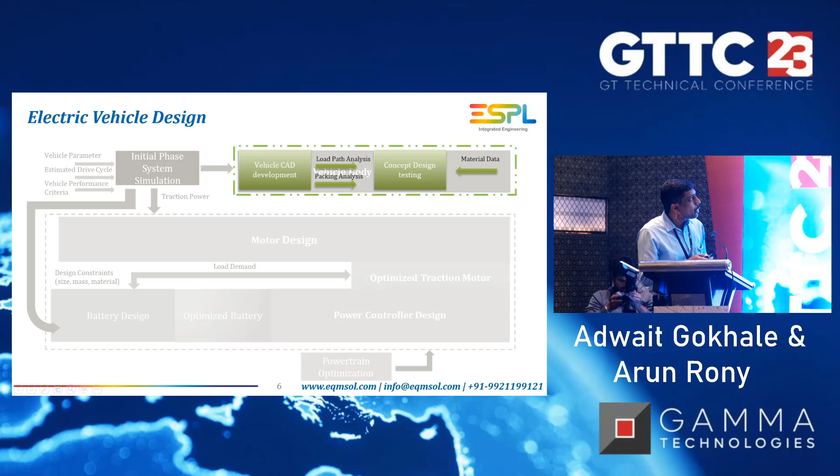Now, once we have the outer shell of the vehicle body, we will go for a space model development. This helps us to analyze different vehicle shapes and floor configurations. This is followed by a packaging analysis of the parametric CAD model. And the space models are further examined using topological optimization on the global load paths. From these analyses, we will be able to develop the body in white, BIW. That would be our first stage. Then at the component level, we have the traction motor. We are starting with the traction motor.

And for any design of motor, we start from the initial specifications. That's the torque, speed, and the dimensions, size restrictions. From these, we will be able to develop an analytical model, which will be further optimized based on the winding architecture and the topology. And then they will be subjected to the target drive cycle evaluations. And from there, we will develop the most optimized motor design. Then that will be taken for further advanced electromagnetic simulation, multi-physics optimization, and then integration to system level.

Now we are moving on to the next important component, that's a battery. And at times, it's the most important and expensive component which powers the entire electric vehicle. Here also, we will take in the basic size constraints, and then we go into the modeling of the battery. So that can be broadly classified into 3 stages, starting at the cell level where we choose the cell chemistry, the cell type, and then into the pack level, where we study more about thermal management of the battery pack. And then finally, taking the optimized model into system level to see the performance of the battery pack at various operating points.

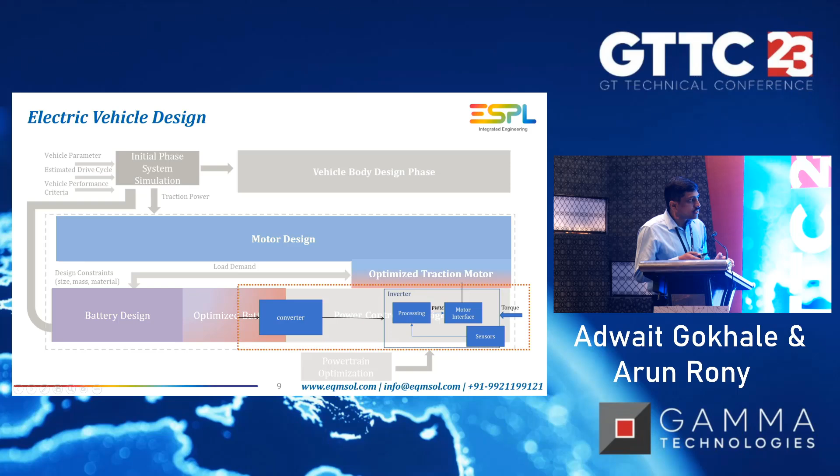Finally, we have the power electronics, which basically includes the converters, inverters, and onboard chargers. They typically operate at high frequencies, high voltage and high current, so that leads to high switching rates. This translates to high thermal responses, calling for thermal management of power electronic devices. So these are some of the components and the overall stages which are involved in a battery electric vehicle. So the key takeaway here is this is a multi-physics phenomena, as we saw, and it calls for an integrated engineering approach. So we need to evaluate them both at the component level and also at the system level.

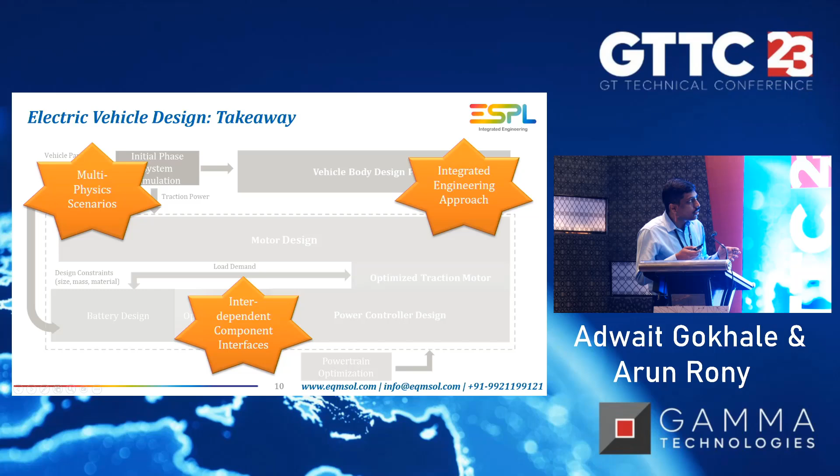So now we are moving into the objective of the current study. So here we are trying to define the methodology to develop the three-wheeler in GT-SUITE and to evaluate it. So it has been basically done in 2 stages. One at the component level, where we'll be validating the individual components and then defining the models in GT and further taking them into system level. And then finally, we'll see the performance of the system as a whole.

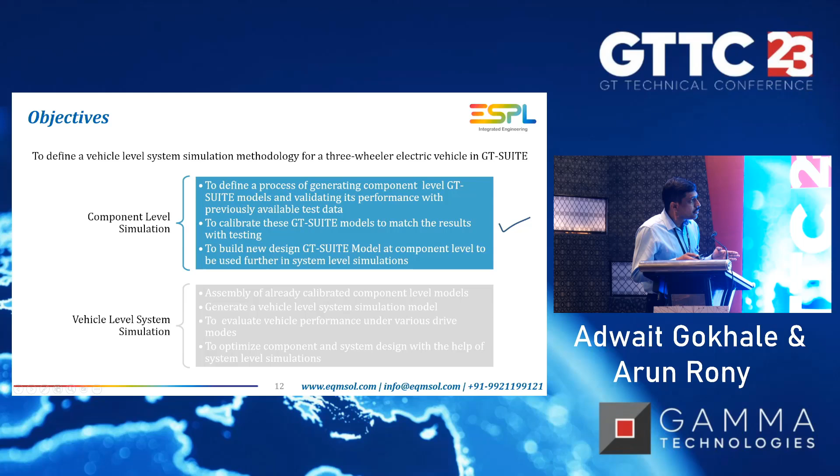So first we'll start from the component level simulation. So we are starting from the traction motor, and we are validating this with respect to some test data. So from there, we have got the winding parameters, our material definitions, as well as the geometric inputs. With this, we will be able to develop the analytical model, and from that, we develop a more detailed finite element model for evaluating the flux distribution of the motor. This again was validated against the test results. Now, once we have this validated motor model from our electromagnetic solver, we will be able to take it to GT. Here, GT offers us 2 methods to model it. One is the equivalent motor method, and another based on the efficiency map.

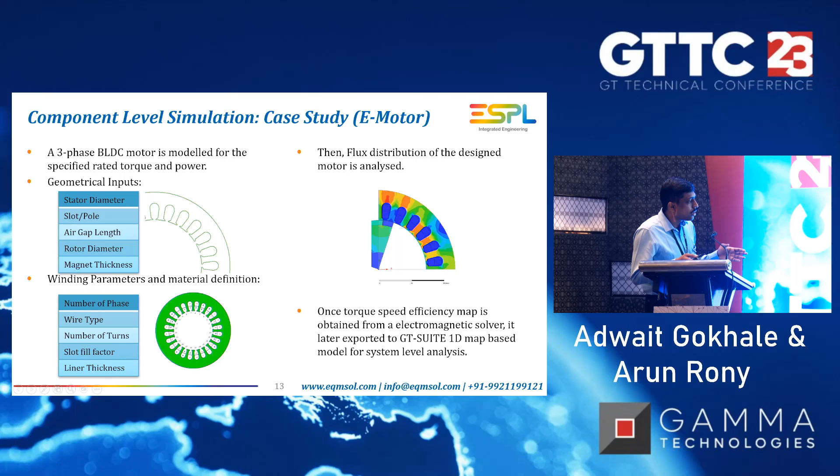So these are some of the outputs of interest that we got from our electromagnetic solver once we model the motor. On the top, we have the efficiency versus speed curve, the torque versus speed curve on the right, and at the bottom, we have the current versus speed curve. We can observe some high current at the starting. This is owing to some structural characteristics of the motor. And similarly, owing to the high drive force in the beginning, we are seeing high torque at the beginning. And with respect to correlation, we are able to see less than 10% deviation with respect to test results.

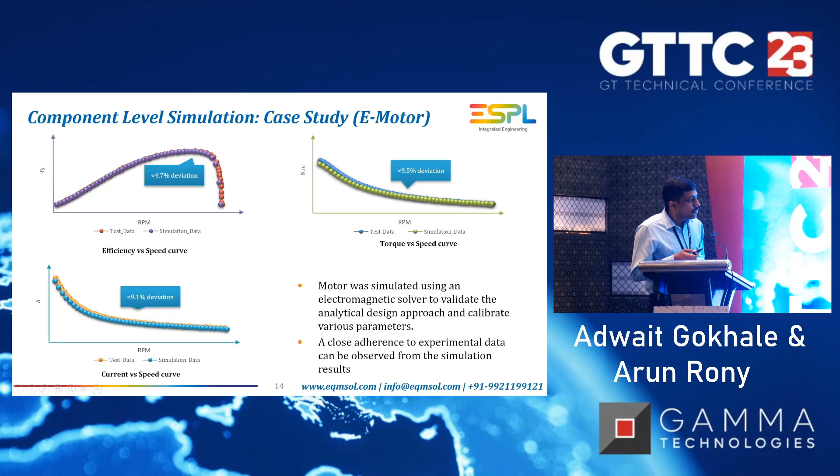Now moving on to our next component, which is a battery. Again, here GT offers us 2 methodologies. One is a detailed electrochemical modeling with the help of GT-AutoLion, and second, an equivalent circuit-based approach, which takes in 2 key primary inputs. One is the internal resistance for charge and discharge curves and open circuit voltage curves for charge and discharge cycle. So below we can see a typical equivalent circuit for a battery model. On to the right, we can see how these input curves have been fed into GT.

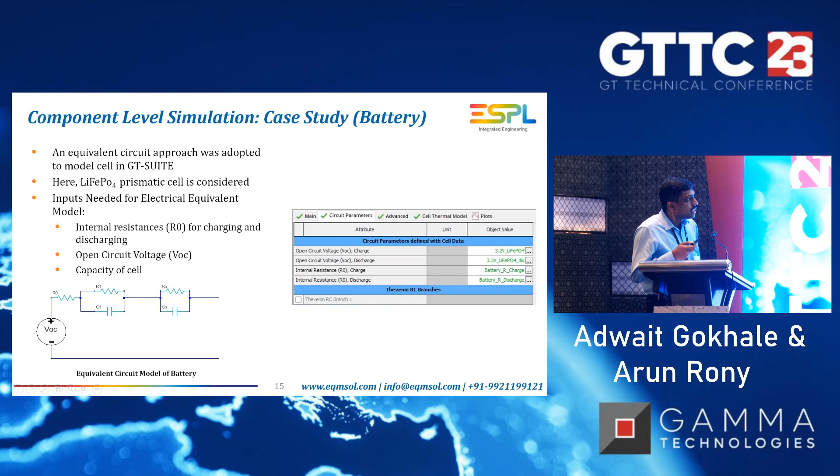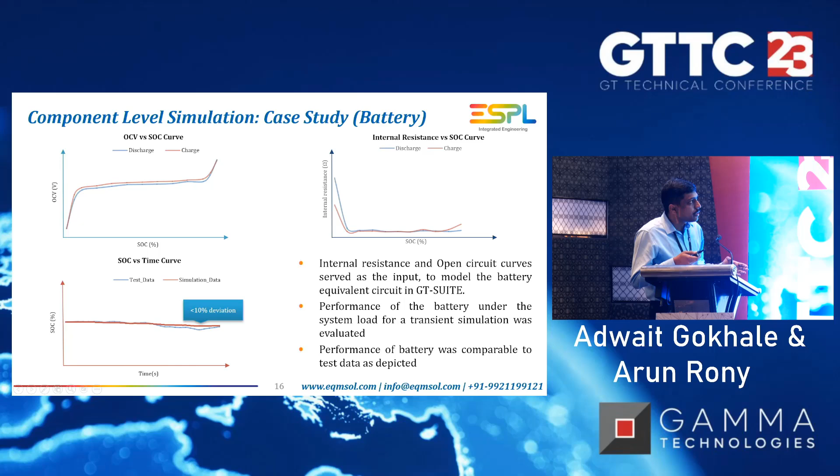On the top, we have the SOC curves for open circuit voltage and internal resistance. These are the characteristic input curves which are fed into the model. And here we have considered a lithium iron phosphate cell, a prismatic cell, for our evaluation. And we can see the test result with the SOC versus time, and the correlation with test results for the performance of the system under the transient simulation. So we have seen how we have modeled the electric motor and the battery pack in GT and how they are calibrated with respect to the test results. And now we move on to see how to take these components into the system level.

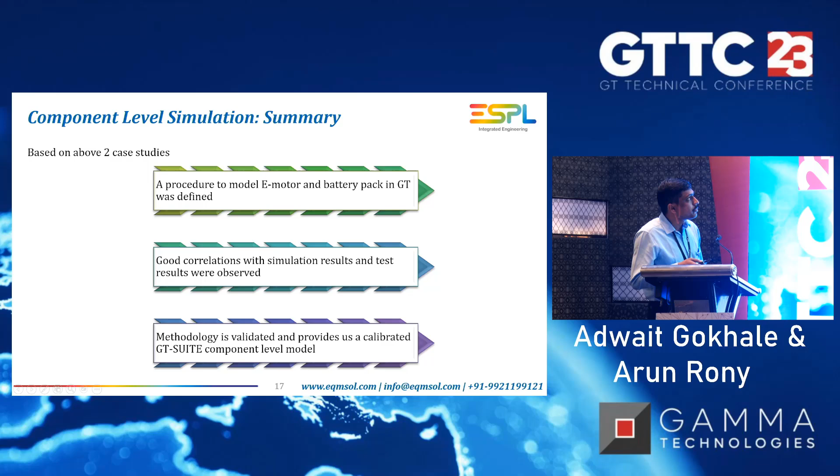Let's start from the system level by looking at the specifications of the vehicle. So here we have considered a commercial three-wheeler vehicle based on the available data, and throughout the entirety of the simulation we have taken 3 passengers, 1 driver and a payload. And on to the right we can see some of the key characteristics of our vehicle that we have considered.

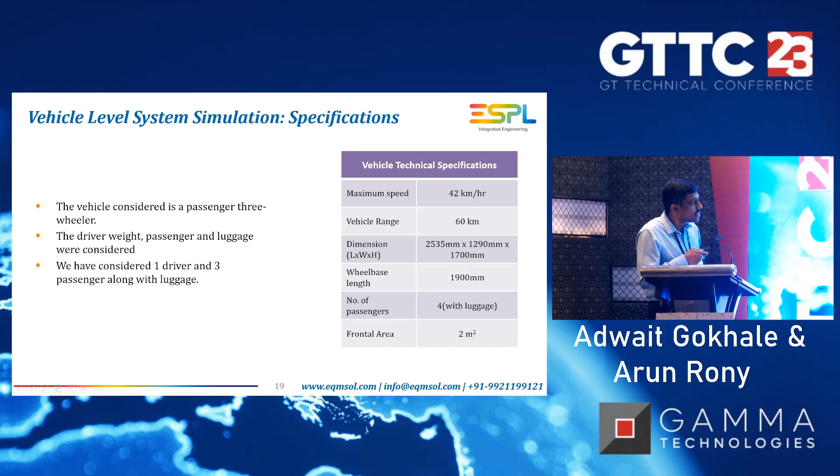Next, we are talking about specifications of the components that we have validated earlier that have been taken into the system level. So starting from the motor side, we had considered a 3 kilowatt motor with a rated speed of 1600 rpm and having a torque of 20 Newton meter. As discussed earlier, we have considered an efficiency map based model. So here it is a contour plot of torque, speed and efficiency points. This is what is being fed into GT as a lookup sheet, and GT will interpret the results using this.

On the right, the battery pack we have considered is a lithium iron phosphate prismatic cell, which we discussed earlier. And for a range of 60 kilometers, we have considered 15 cells in series and 4 cells in parallel, having a rated discharge of 1C. So these are the components that we have considered for a system level analysis.

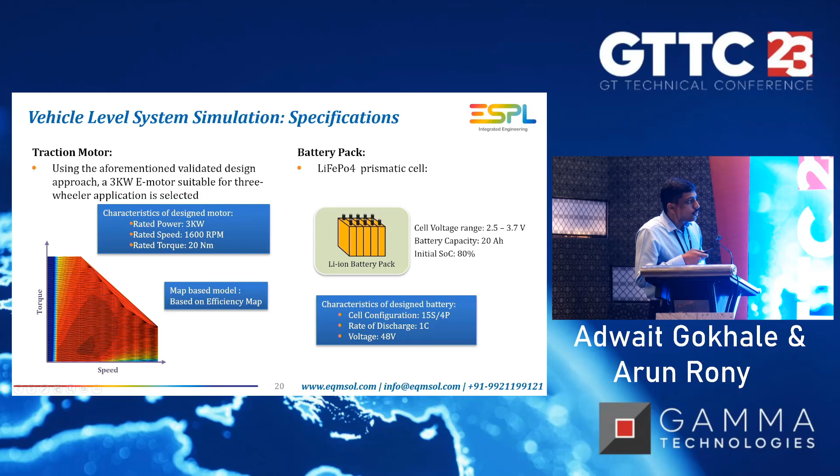Now let's look at the 1D map workflow in detail. In the middle, we have the vehicle body component, which calculates the longitudinal motion of the vehicle. And then onto the top left, we have the electric motor model, which is based on the efficiency map. That takes in the brake torque and the power as input to give out the torque speed with respect to efficiency map points. This is connected to the differential in the middle that we can see. That splits the obtained torque into the left and the right wheel.

The axle component considered here is actually rotational inertia, so any compliance and damping is being ignored here. The tire component basically computes the traction and the rolling resistance. And from here, the gross tractive force and the normal load on the vehicle and the axle based on these tractive characteristics will be computed.

And then onto the top right, we have the driver model, which takes the vehicle speed from the vehicle body component and the motor speed as its 2 inputs to give out the required wheel brake torque for the vehicle acceleration. It's basically a feed-forward component that has a PI module also inbuilt that minimizes the error between the demand and the instantaneous values that are coming in. And finally at the bottom we have the road component, which takes into effect the road grade and the road curvature into the simulation.

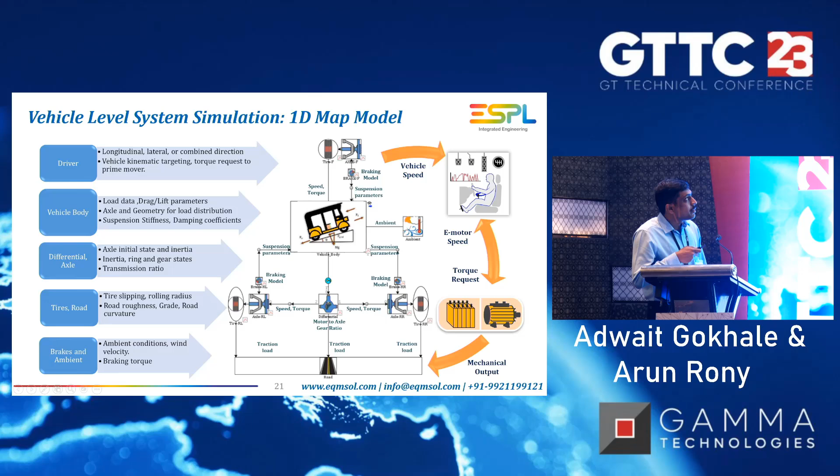So those are some of the key components involved in the vehicle 1D map model. And here we have considered a very primitive battery controller which aims to limit the battery power to avoid overcharge and discharge. So this is a primitive battery controller that we have modeled for initial analysis.

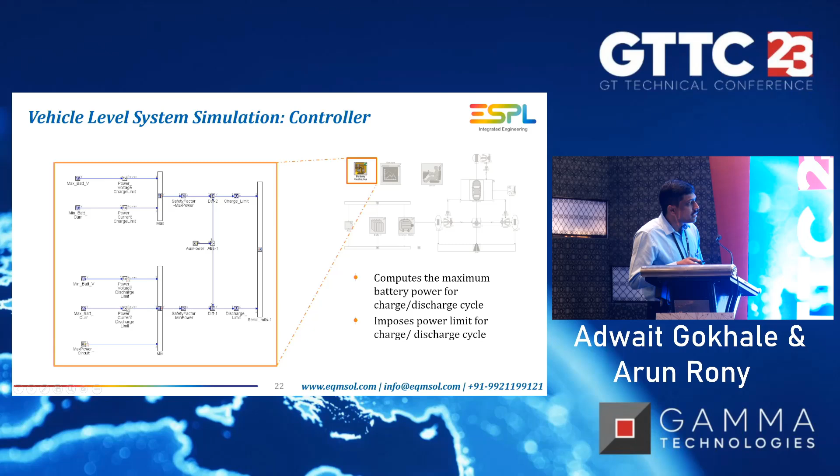Now moving on to the loading scenario, we have considered the IDC cycle. GT provides us a default cycle that can be taken, and some characteristics of the cycle are on the right that we can see. And we are given a starting battery SOC of 80%. The IDC is typically a cycle of 6 segments of 108 seconds in duration, so we have considered 1 cycle of that.

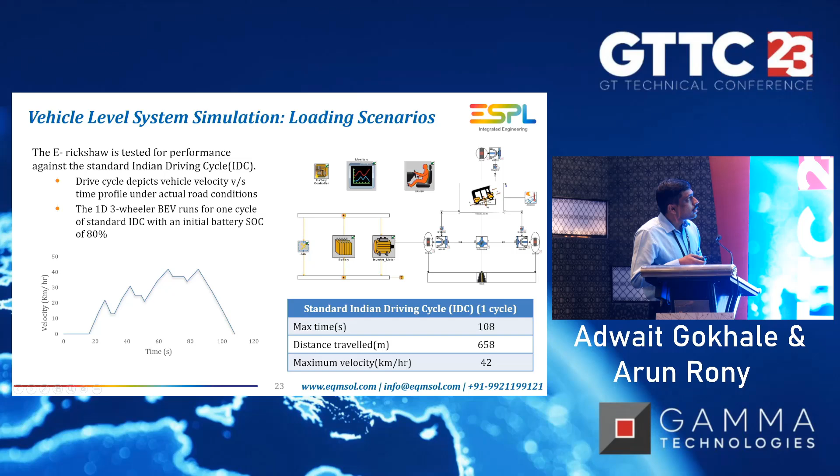And these are some of the outputs of the 1D system simulation. On the top, we have the gross tractive force that has been computed, and it can be observed that the main force that needs to be overcome is the linear acceleration forces. On the bottom, we have the relation between the motor torque and the wheel torque based on the gear ratio that we are given.

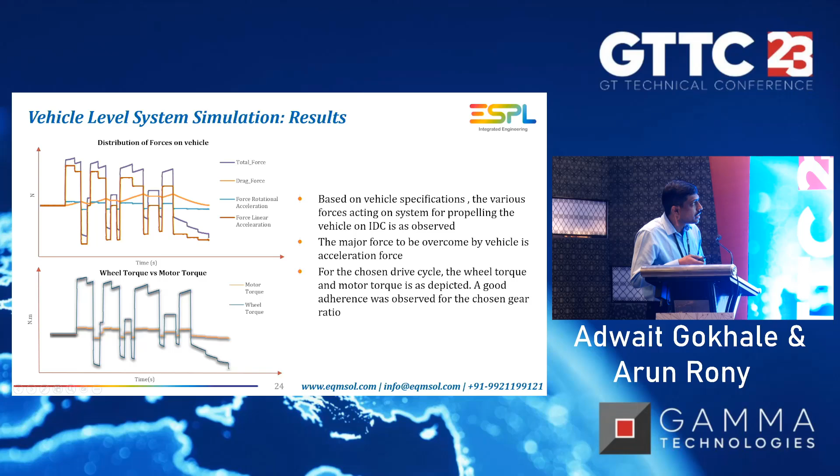Next would be the effectiveness of the system. We can see how it is effectively tracing the actual demand and the requested brake power. And also GT will be able to give out the energy consumption for the range that we have specified for 91 cycles of the IDC. So we can see the energy demand prediction also from the output.

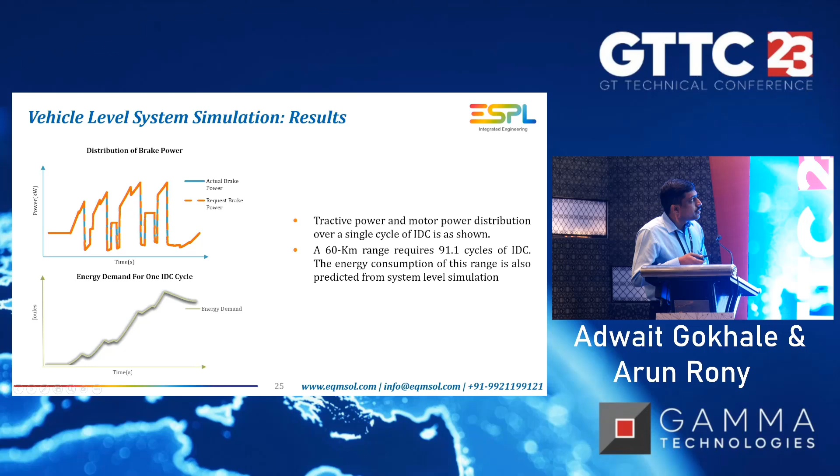Moving ahead to some of the conclusions. We can get an easily configurable model that we can scale up or down. And also we can consider multiple DOEs and see the performance of individual components. In GT, when we talk about GT 1D map models, it offers us quick and easily configurable models. And we can do better sizing performance easily and at a reduced time. Also, it helps us to evaluate multiple DOEs and their performance criteria. And eventually, all this translates to reduced physical test costs.

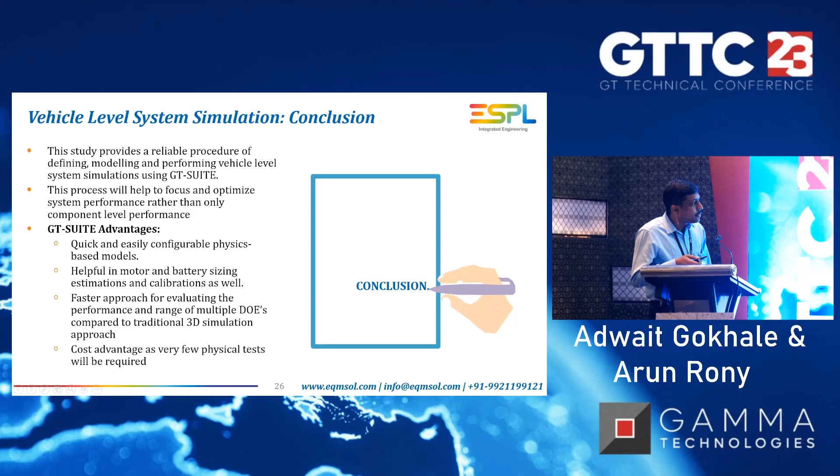And some of the assumptions in our early initial system model are that we have not considered thermal dependencies of the multiple components that are involved, and a very primitive control strategy was adopted in the early stage. And most of the vehicle parameters were based on some commercial vehicle data.

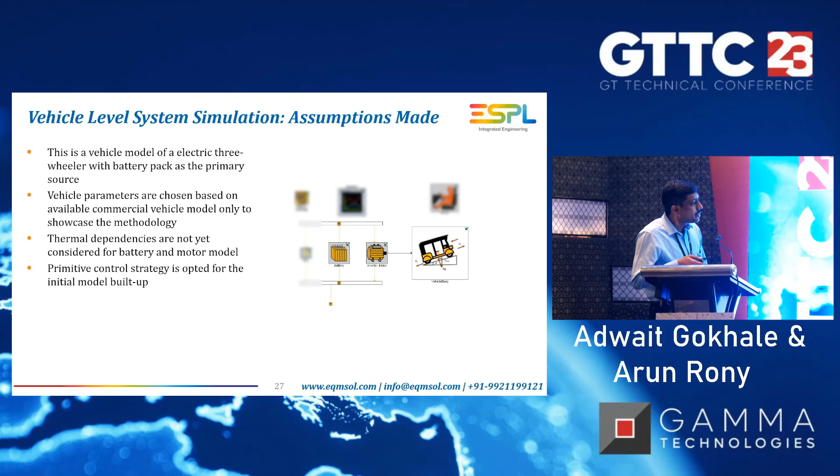So now moving on to the future scope of our study, we would like to validate the parameters that we consider for the equivalent circuit model using the characterization tool for the battery, as we've seen in some of the early slides. And then we need to validate our system level model with actual test data to confirm the adherence to the test results, and to bring a more detailed inverter circuit into the study.

Right now we have not considered a detailed inverter circuit, only the inbuilt GT options, which take in only the efficiency. So a more detailed circuit will be part of the future study, and a better energy management strategy with the help of an ultra supercapacitor in conjunction with the battery, to offer higher power density and some other benefits of ultracapacitors in conjunction with system level modeling.

Then finally, we would like to evaluate the tested system level model with actual traffic data to evaluate the performance of the e-rickshaw using GT RealDrive.